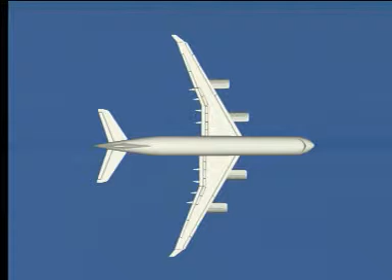This visit corresponds to a detailed presentation visit focusing on all elements of the various aircraft zones. This is primarily a visual check to ensure that the overall condition of the aircraft, the visible components and equipment, are safe.

During the inspection, check for proper position of the control surfaces, damage to the structure, fluid leakage and closure of the access panels and doors.

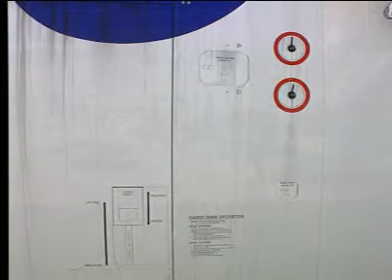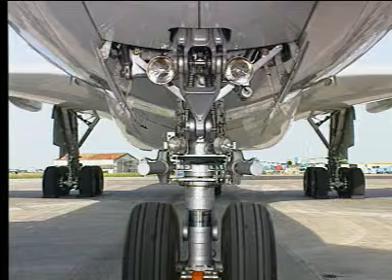In cold weather conditions, check for ice or frost accumulation. As brake wear has to be checked during the inspection, set the parking brake before leaving the cockpit.

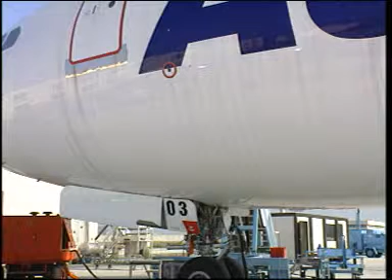The visit starts at the left forward fuselage. Check that the overpressure relief valve is properly closed. Verify that the captain angle of attack probe is not damaged.

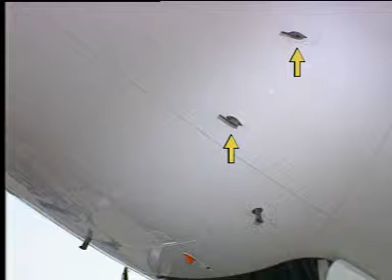Let's now move on to the nose section of the aircraft. Check that the captain and standby pitot probes are clean. Verify the condition of the captain and first officer TAT probes.

Make sure that the avionics access compartment is closed. Inspect the radome for cracks, deformation or lightning strike, and also check that the latches are engaged.

Check that the first officer pitot probe is clean. Make sure that the green oxygen discharge indicator is in place. In case of overpressure in the oxygen system, the disc would be missing.

Now, inspect the nose landing gear and doors. Check the condition of taxi, takeoff, and turn-off lights for damage and cleanliness.

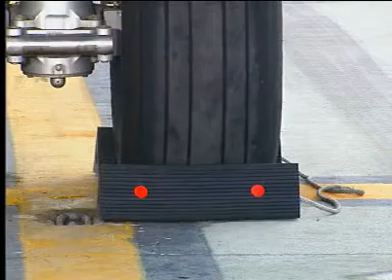Make sure that the nose wheel chocks are in place. Look at the wheels and tires for wear, cuts, and cracks.

Observe the landing gear structure and make sure that the shock absorber is inflated. A chrome part has to be visible.

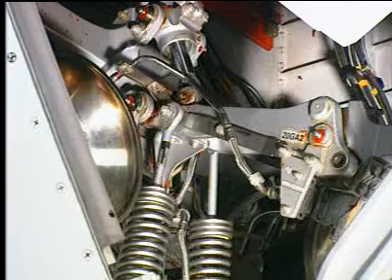Check for good condition of hydraulic lines and electrical wires. Check the wheel well for leaks and make sure that the ground safety pin is removed.

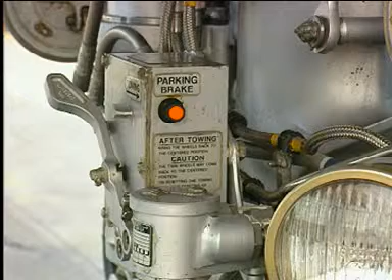Looking at the steering box, make sure that the parking brake light is on and that the steering pin is removed.

If ground electrical power is needed, verify that the security strap is hooked to prevent the plug from falling.

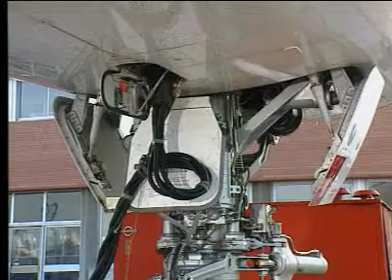Moving now to the right-hand forward fuselage. Inspect the first officer and standby angle of attack probes for damage.

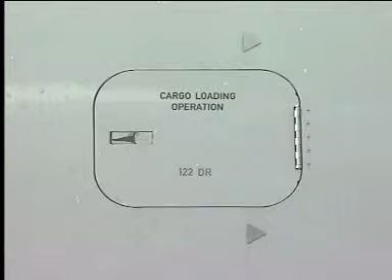Check that the cargo loading control door is closed. Also make sure that the cargo door hydraulic selector access is closed.

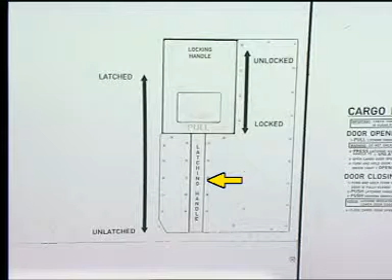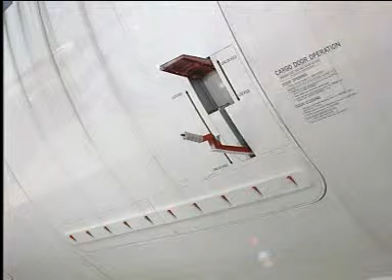The cargo door latching handle must be latched, the locking flapper closed, and the red locking indicators flush for proper closure of the cargo door.

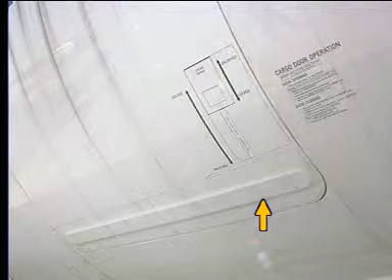While moving along the aircraft, inspect the lower center fuselage. Check that the standby, captain, and first officer static ports are clean.

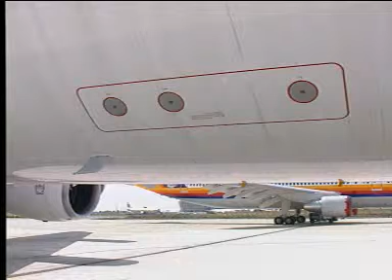Still following the fuselage, verify the condition of the drain mast and the various antennas.

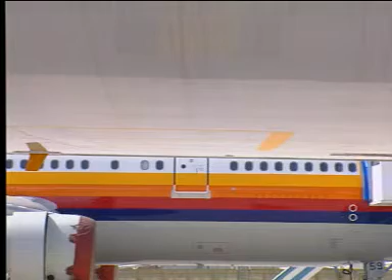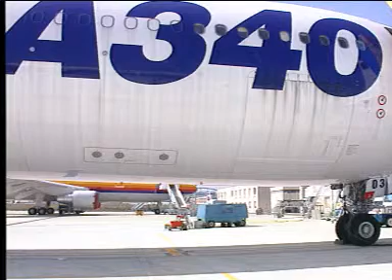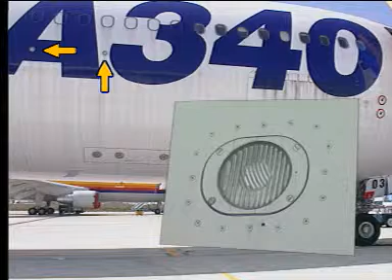Below the fuselage, make sure that the avionics ventilation outlet is open. Check for good condition of the wing and engine scan lights. Make also sure that the air conditioning compartment ventilation NACA inlet is clear.

Looking now at the center wing section. Check the beacon light for condition.

Verify that the right-hand pack ram air inlet and outlet are clear.

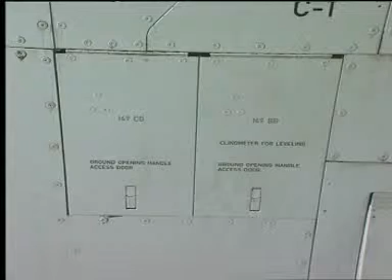Make sure that the right main and center landing gear door handle accesses are closed. Verify that the center tank fuel magnetic indicator is flush with the fuselage.

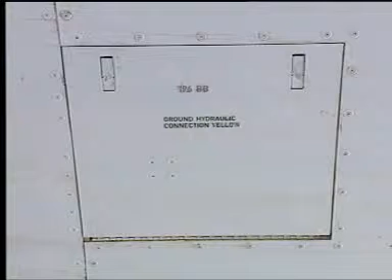Check that the yellow hydraulic servicing panel is closed. Observe that the center tank water drain valve access is closed and that no leaks are visible.

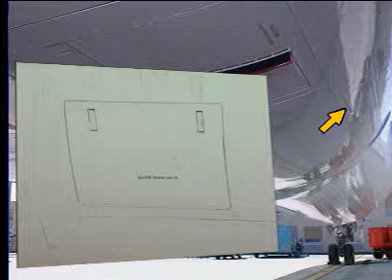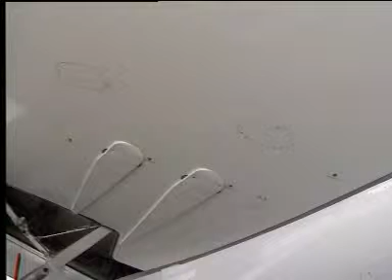Now, take a look at the right-hand leading edge in the area of slat 1. On the wing lower surface, check that the fuel magnetic indicators are flush with the fuselage,

and check for leaks from the fuel water drain valves.

Moving on to the wing leading edge, check the landing light for condition and damage and observe slat 1 condition and position. Reaching engine 3 on the left side, verify that the engine oil access door is closed.

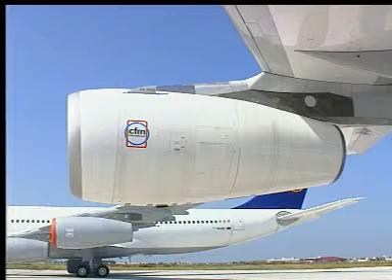On the pylon, check that the fire extinguisher bottle access is closed. Check that the reverse blocker doors are closed and latched.

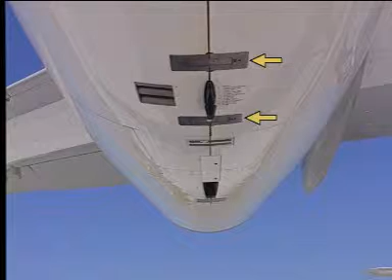Under the engine, check the drain mast for condition and that there are no leaks.

Moving to the front of the engine, check the inlet nose cowl and fan blade condition and the temperature sensor.

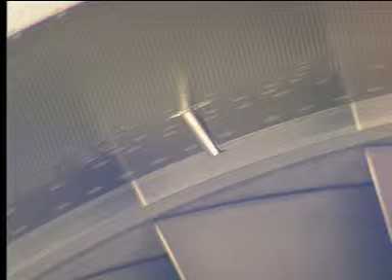On the right side of engine 3, check that the anti-ice outlet is clear. Verify that the ECU cooling NACA inlet is clear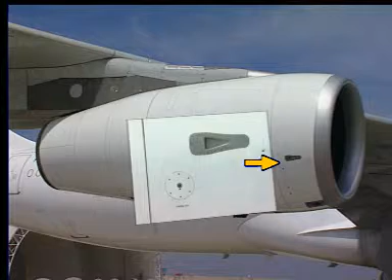and check the phone jack for condition.

Check that the reverse blocker doors and the pressure relief and start valve access are closed.

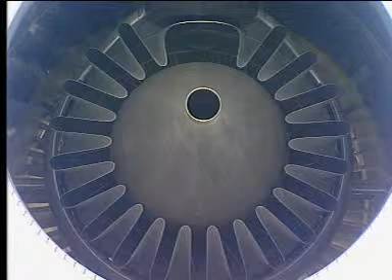At the rear of the engine, verify that the exhaust is clear. On the pylon, check that the fire extinguisher bottle access is closed

and make sure that the pylon ventilation inlet is clear. Finally, take a look at the pylon drain for leaks.

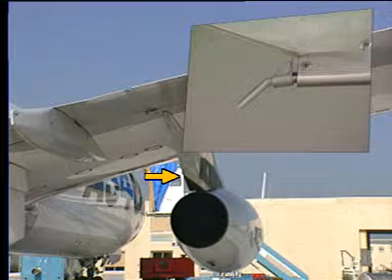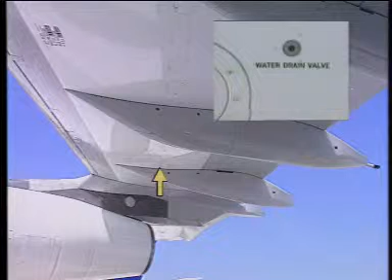Whilst moving along the wing between engines 3 and 4, verify that the fuel magnetic indicators are flush with the wing and that there is no leak from the outer tank fuel water drain valve.

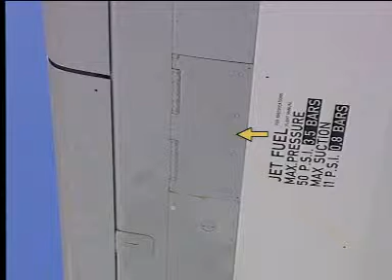At flap track fairing number 4, check that the rat door is closed. On the wing leading edge, verify that the refuel coupling panel is closed and check the slats for condition.

When reaching engine 4, the inspection is performed in exactly the same way as for engine 3.

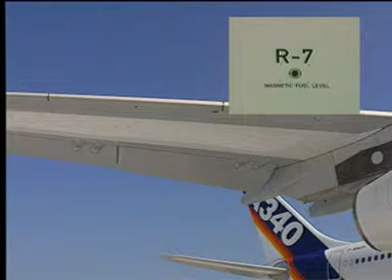From engine 4 to wingtip, check the slats for condition, verify that the fuel magnetic indicators are flush with the wing, and that there is no leak from the surge tank water drain valve.

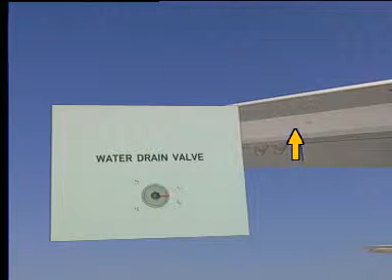Make sure that the surge tank NACA intake is clear and inspect the fuel overpressure disc.

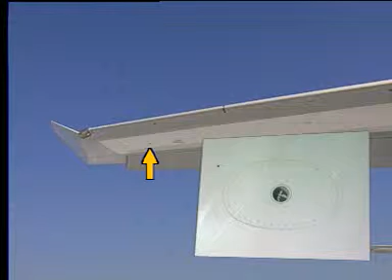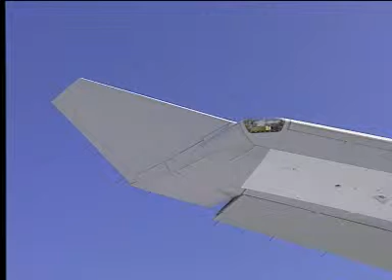From the wingtip, check the navigation and strobe lights for condition. Moving around the wingtip, take a look at the static dischargers to check that none are broken or missing.

Then check the winglet for condition. Along the wing trailing edge, inspect the ailerons, the flap track fairings, and the static dischargers.

Verify the fuel jettison nozzle for condition and for leaks. Check the flaps for condition and position.

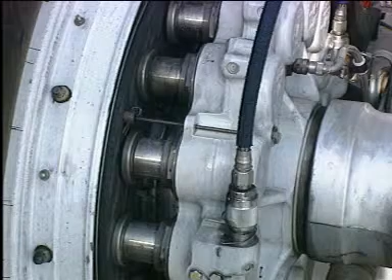When reaching the right main landing gear, check the doors for condition and make sure that the wheel chocks are removed. Verify the brakes and the brake wear indication. If the indicator is almost flush with the guide, the brakes must be replaced.

Look at the wheels and tires for wear, cuts, and cracks. Check hydraulic lines and electrical wires for condition. Observe the main gear structure for general condition and make sure that the shock absorbers are inflated.

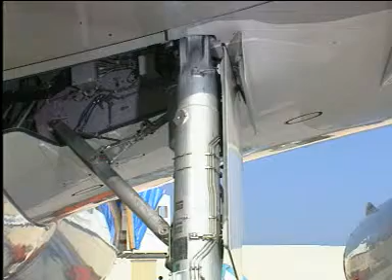Check the state of the downlock springs and make sure that the ground safety pin is removed.

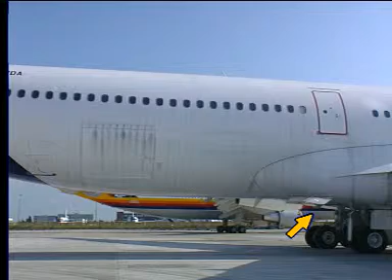On the right-hand aft fuselage, check that the refuel control panel is closed. Check the APU shroud drain for condition and leaks.

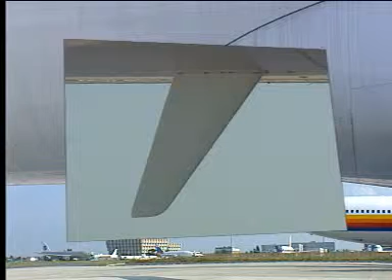Verify the condition of the VHF antennas and the radio altimeter antennas.

Check the water drain mast for condition. Make sure that the aft water drain panel is closed.

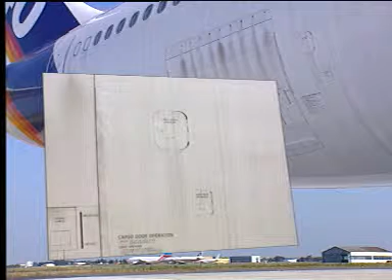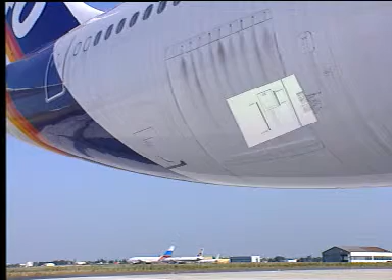Inspect successively the cargo loading control door, the cargo door hydraulic selector access, the latching handle and locking flapper, and the cargo door locking indicators.

Verify that the bulk cargo door is closed, that the potable water service panel is closed, and that the toilet service panel is closed.

Finally, check the APU battery outlet for leaks.

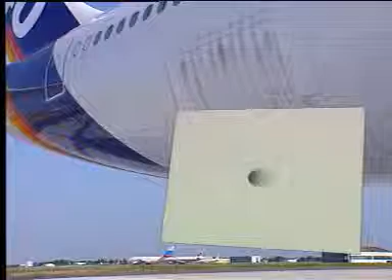Moving on to the tail, make sure that the galley and toilet ventilation outlet is clear. Verify that the THS access is closed.

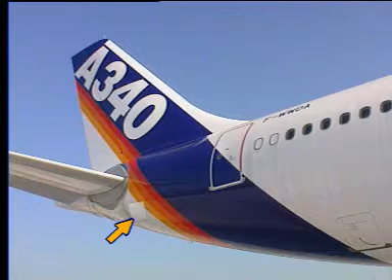Observe the stabilizer and check the condition of the surge tank water drain valve, of the trim tank air inlet, and of the fuel overpressure disc.

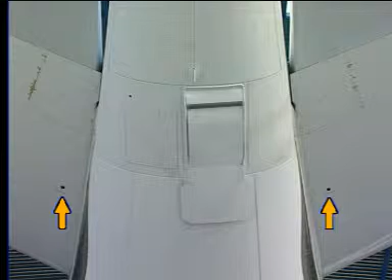Check the condition of the trim tank water drain valves for leaks. Also, make sure that the static dischargers are not damaged.

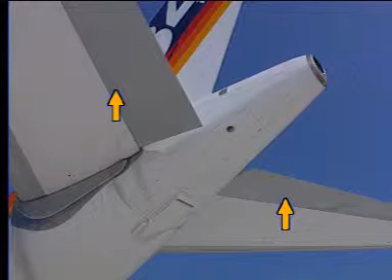From behind the aircraft, check the elevators for good condition. Verify that the APU cowls are closed and that the APU oil cooler outlet is clear.

Make sure that the APU air intake is clear and that the fire extinguisher bottle access is closed. Check the state of the APU fire extinguisher discharge indicator.

Verify the condition of the drain mast. Make sure that the APU exhaust is clear and the rear strobe light is in good condition.

Finally, inspect the rudder and the static dischargers in case of damage.

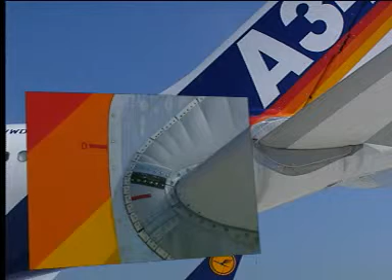Whilst walking along the left side of the aft fuselage, check for correct position of the THS position indicator. Verify that the vacuum toilet outlets are clear.

Check the aft outflow valve for condition. And make sure that the green hydraulic servicing panel is closed.

On the center landing gear, check the wheels and tires for wear, cuts, and cracks. Make sure that the mechanically operated doors are closed. Check the hydraulic lines and electrical wires. Observe the center landing gear structure for general condition.

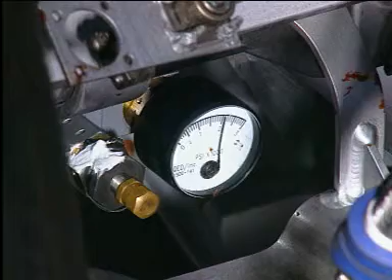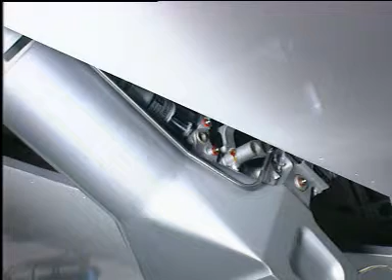Check the shock absorber pressure on the two gauges, the lower gauge and then the upper gauge. Make sure that the gear safety pin is removed.

Proceeding now to the left main landing gear, the inspection is the same as for the right main gear. Verify that the wheel chocks are removed and check the condition of the main gear doors. Observe the wheels and tires for wear, cuts and cracks.

Check the brakes and the position of the brake wear pin. Verify the shock absorbers, the hydraulic lines and electrical wires for condition.

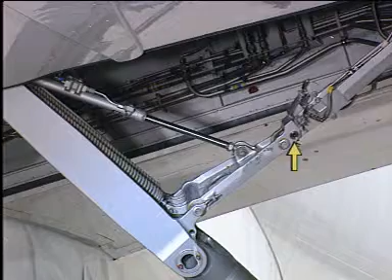Observe the main gear structure for general condition and make sure that the gear safety pin is removed.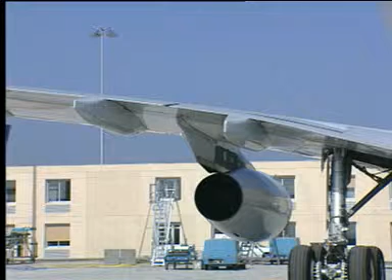Along the left wing trailing edge, check the condition and position of the flaps and make sure that the flap track fairings and static dischargers are not damaged.

Take a look at the fuel jettison for condition and leaks. Verify the good condition of the ailerons and static dischargers.

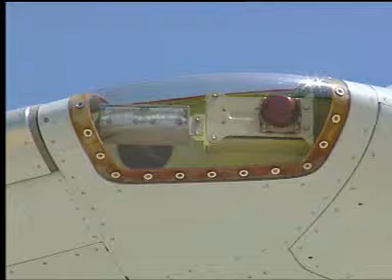When moving around the wingtip, verify the state of the winglet and check that the navigation and strobe lights are in good condition.

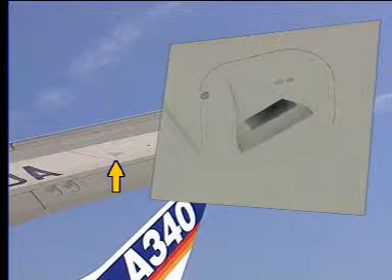Make sure that the surge tank air inlet is clear and check the fuel overpressure disc.

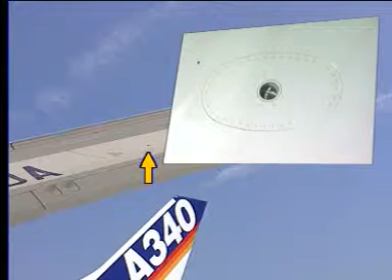From wingtip to engine 1, check the condition and position of the slats. On the wing lower surface, make sure that the fuel magnetic indicators are flush with the wing and that there is no leak from the surge tank water drain valve.

Inspect engine 1 in the same way as engines 3 and 4. On the wing leading edge, inspect the slats for condition and position and verify that the refuel coupling panel is closed.

Moving below the wing, check that the fuel magnetic indicators are flush with the wing and that fuel does not leak from the outer tank water drain valve.

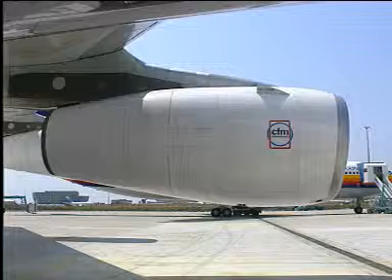Engine 2 is inspected in the same way as the 3 other engines. Close to the center wing, inspect slat 1 for condition and check the landing light for damage.

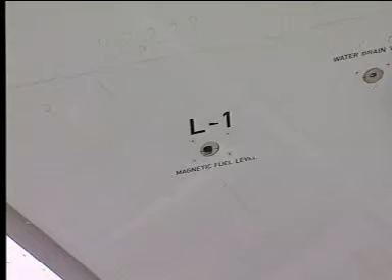Check that the fuel magnetic indicators are flush with the wing and make sure that there is no leak from the water drain valves.

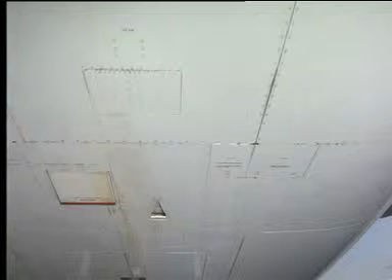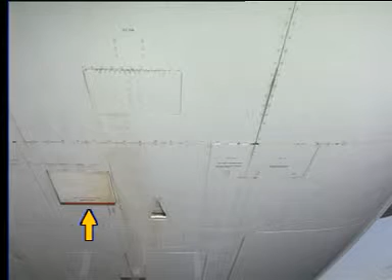Walking below the center wing, make sure that the blue hydraulic servicing panel and the LH gear door handle access are closed. Verify that the hydraulic compartment ventilation and the left pack ram air outlet are clear.

The center tank water drain valve access door must be closed.

Moving forward, make sure that the emergency ram air inlet and the low-pressure ground connection access door are closed.

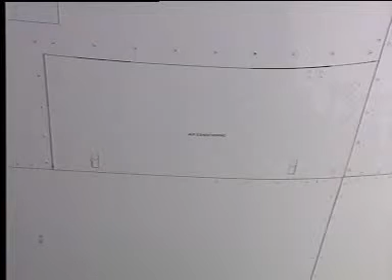Inspect the left pack ram air inlet and make sure it is clear. Finally, check that the high-pressure ground connection access door is closed.

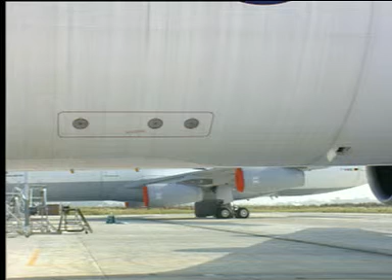Moving forward along the left-hand fuselage, check that the forward outflow valve is open. Verify that the forward potable water drain panel is closed.

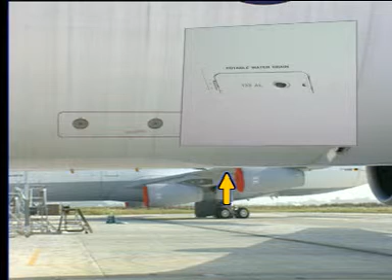Check that the standby, captain, and first officer static ports are clean. Finally, inspect the wing and engine scan lights for good condition.

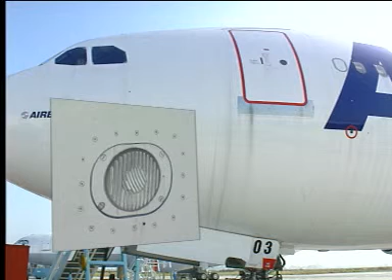All the various stations and components have been checked and properly inspected. You have completed this detailed external visit.